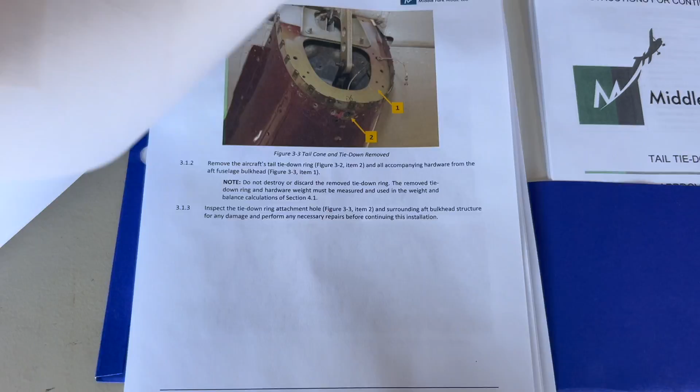It looks pretty comprehensive. They have very nice instructions. This is one area they did not cut corners. Some manufacturers, well, they don't go into this much detail, but these guys included a very nice set of instructions, parts list, and all kinds of very nice detailed instructions. Without further ado, let's get right to it. I'm pretty excited to finally be doing this.

I don't even know what started this, but really, one of the things about 182s, these things are nose heavy. And so I've always wanted to add some weight to the tail somehow, give myself a little bit better CG. There's no legal way to just bolt weight to the back. So I started looking around and I found this mod is mostly geared towards backcountry flying for guys who end up hitting the tail and dragging that tie down ring across the ground and bending up their aft bulkhead and all kinds of other stuff in the airplane.

So also flight schools, people who are still learning to land, sometimes they hit the tail. There's an add-on here. You can see it's an extra skid that goes on top of the tail skid so that it doesn't grind down the aluminum. So we'll get more into that later. Let's get started on the airplane.

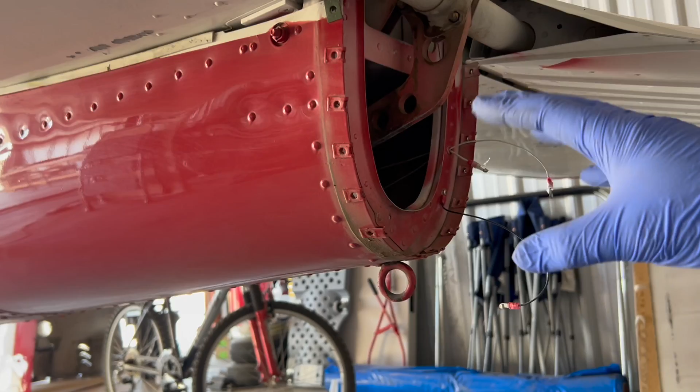First things first, I just need to gain access. So I removed the back stinger off the tail. Here's the factory tie down ring that we're gonna be replacing. That's gonna come out, and that row of rivets right there is gonna get drilled out. You can see the row of rivets that we're gonna have to remove and replace right there.

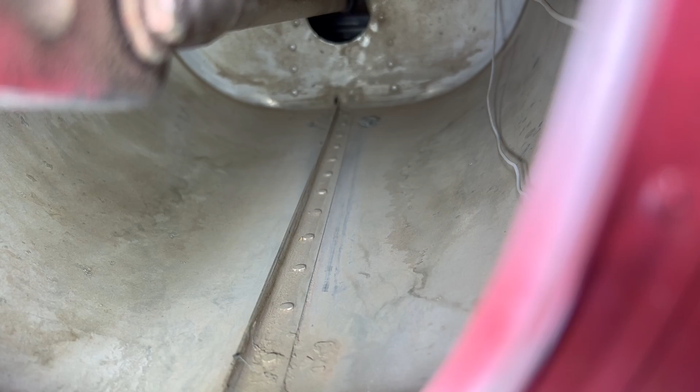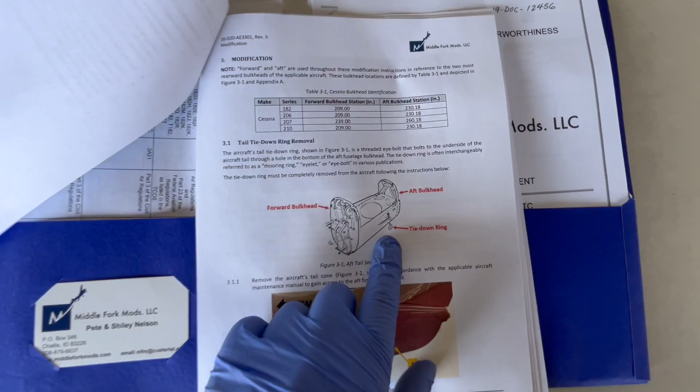First thing we wanna do is remove the tail tie down ring. It's shown right here in figure 3-1. It's a threaded eye bolt. It must be completely removed before we are able to continue. So let's do that. 1/2-inch socket, remove the nut off the tie down ring.

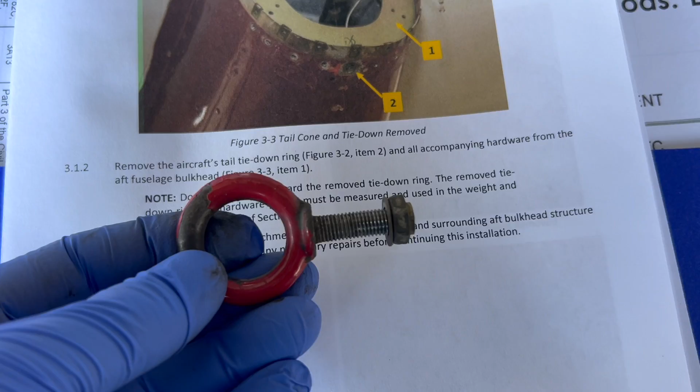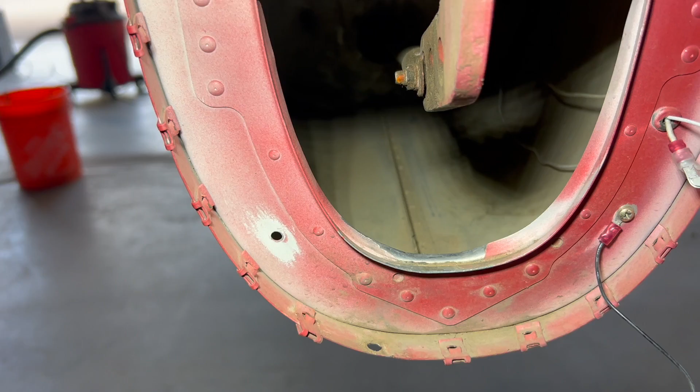So once you remove the tail tie down ring and all the accompanying hardware from the bulkhead, you want to go and inspect this whole area for any damage. Make sure that there's no repairs that need to be made before you start putting this new tie down replacement together. Aside from being a little dirty, I think it looks pretty good.

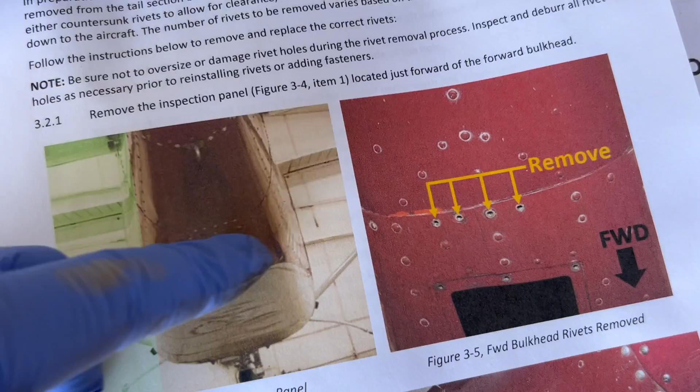Let's move on. Basically from here to here, we need to remove a bunch of rivets, and it calls out exactly where you need to remove them in the installation diagram. So here's what it's going to look like once it's in place. Now I need to go and remove all the rivets, start mocking up the holes for this thing.

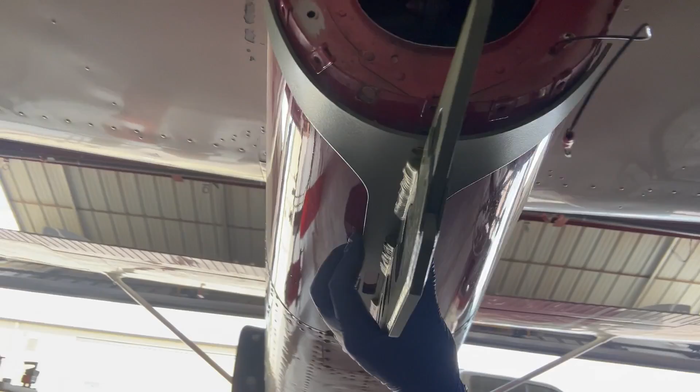I've gone and marked all the rivets that need to be removed along this line, this area right here, and coming up the sides right here. Instructions say it might vary airplane to airplane, so if you're doing this, make sure you check carefully before you start drilling holes in your airplane.

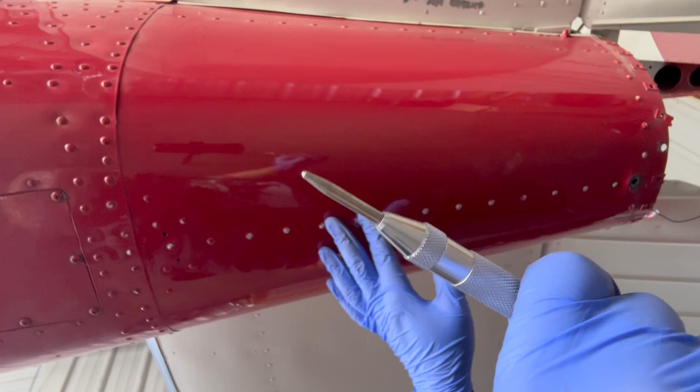So I was just using an automatic center punch, marking the center of all my rivet holes. Definitely helps, especially if you can't see the dimple on the rivet head. These all look like 1/8-inch rivets or -4s. I'm gonna start off by drilling with a number 40 bit, and then I'll pull the heads off with the number 30, and then I should be able to punch the body of the rivet out. It's really important. You don't want to elongate the holes or open up the holes to a larger size. So you gotta be really careful doing this.

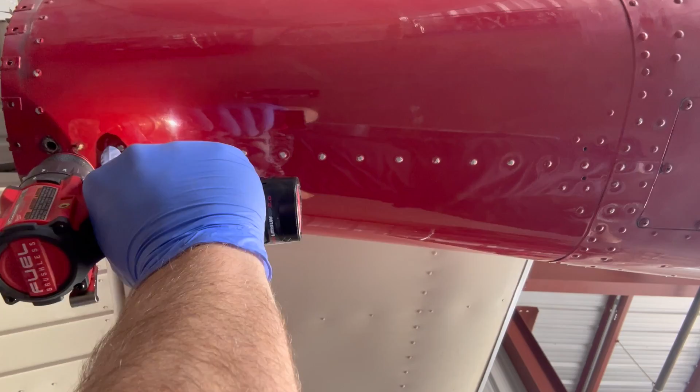All right, I am really struggling with this job and this creeper. I need a better option. There is no way I can finish this laying on my back like this. I need to be about a foot closer or sitting up. I think I found the perfect solution. It's an adjustable creeper. The back sits up, the bottom sits up. You can adjust both sides. I gotta get one of these. I'll be right back, but I don't think I can do this anymore until I have one of those creepers.

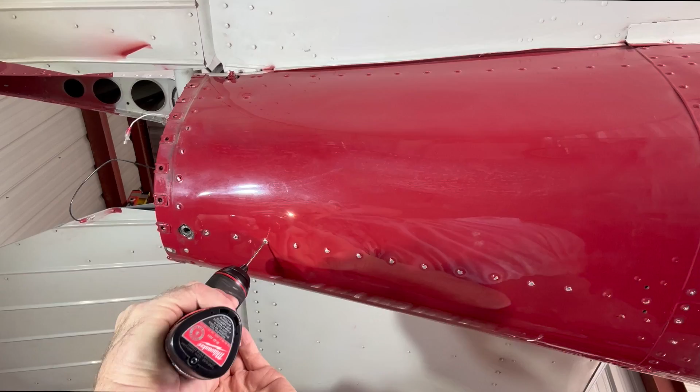Back to what I was doing, drilling out these rivets. All right, now that I've got all my rivets removed, I can start prepping for the dimpling of all these holes. In my typical fashion or fanatical fashion, I feel compelled to get in there and clean before I do anything else. Access was a little bit of a problem, so I removed the elevator push rod, which also helped me get in there for riveting. Let's clean this thing up.

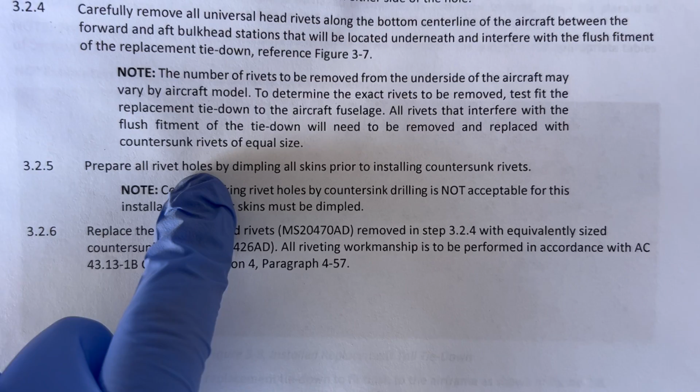All right, well, not perfect. That sure is looking a lot better. Prepare all the rivet holes by dimpling skins prior to installing countersunk rivets. So this is tricky, and what I'm gonna use here is a pop rivet dimple die. So I can go in from the inside, insert my dimple die, and then use a pop rivet gun to set my dimples. Let's try it.

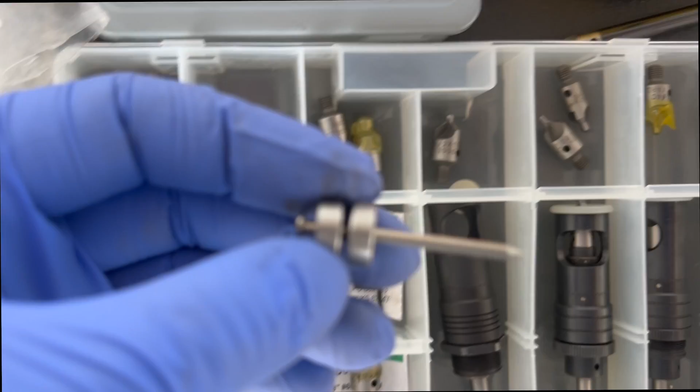All right, so the pop rivet dimple die trick did not work. I'm gonna go to the next level here and try to use a rivet set on a rivet gun with a custom made backing bar with a countersink in it. Let's see how that goes.

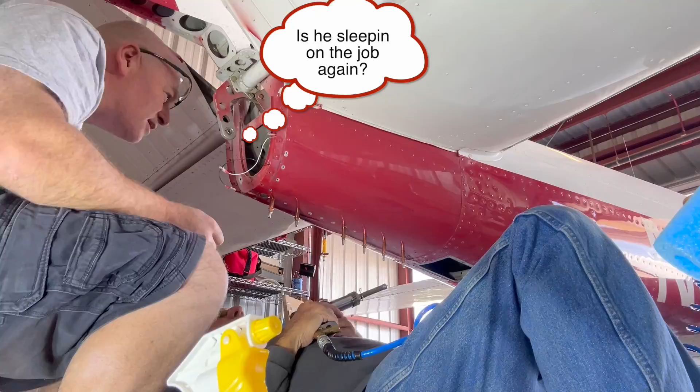The dimpling was a bit of a process, but it went all right. We're gonna go ahead and start setting the rivets now. All riveting workmanship is to be performed in accordance with AC 43.13-1B.

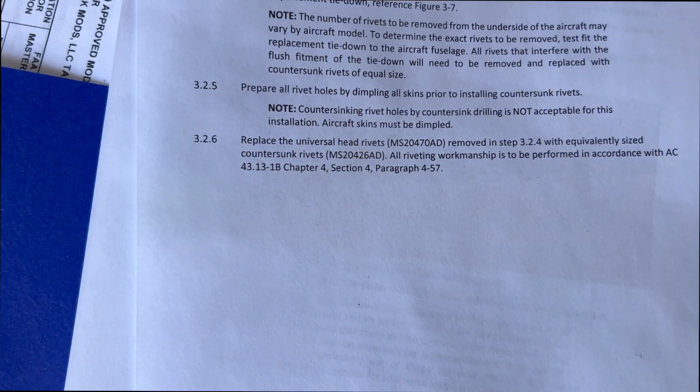That's my helper, Jim. He's my rivet man.

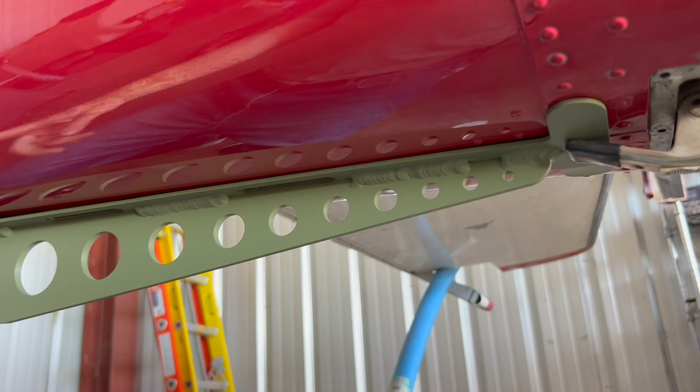Now that we've got the structure all prepared underneath the tie-down replacement, it's time to fit it up and prepare it for attaching to the airframe. Just to recap, first thing we had to do, remove all the rivets underneath here, dimple the skins, flush rivet. So now the tie-down can sit up flush against the belly. All we need to do is match drill our holes around all the mounting points and prepare to attach.

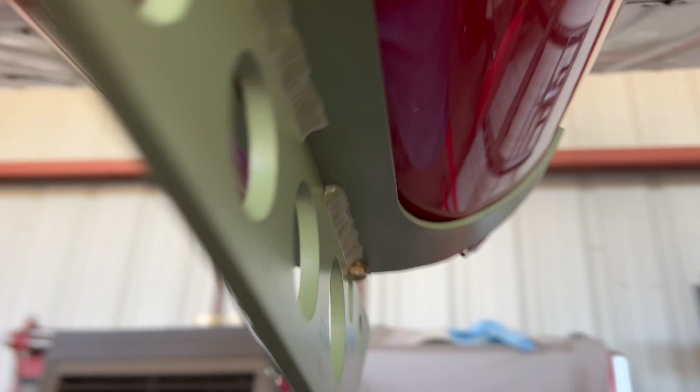There is a note that says you might have to adjust the bend a little bit so that the cradle sits nice up against the fuselage. I did have to make some adjustments here, very minor, but came out pretty good.

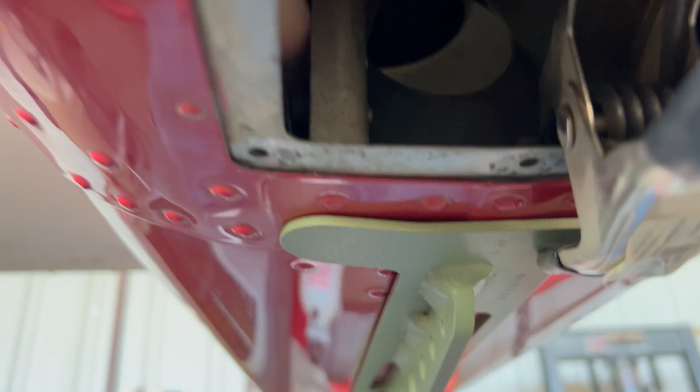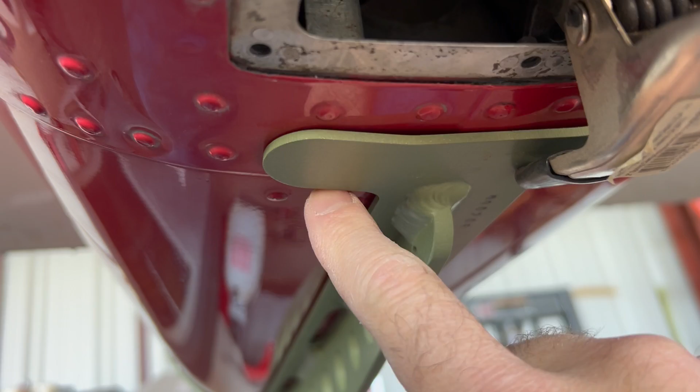This part's pretty tricky. What I'm trying to do, mark the holes from the inside out. I'm using a small number 40 drill bit by hand, and I'm just going up inside and trying to turn the drill a couple times to put some marks on the inside of this surface. So that way I can take it off and I'll see where my hole location is. I can drill it with a small 40 drill, and then I can go and match drill it from the outside.

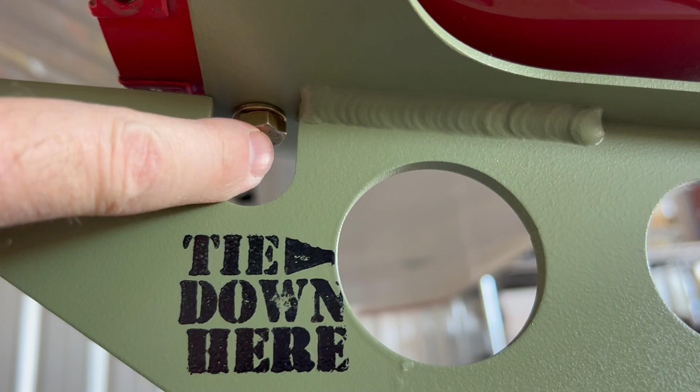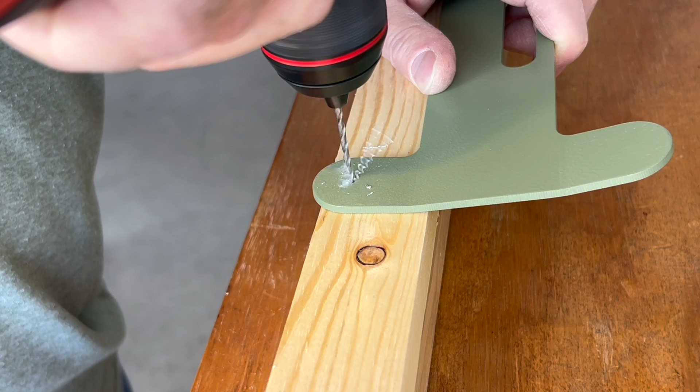On the aft side, I've just got a bolt, which is actually the final bolt that I'll use, but instead of putting the lock nut inside, I just put a non-locking nut in the back so I can easily remove it. Here's the mark I just made by hand with the small 40 drill bit. I'm gonna go drill that, and then I'm gonna put a cleco in that hole. Okay, that worked out perfectly.

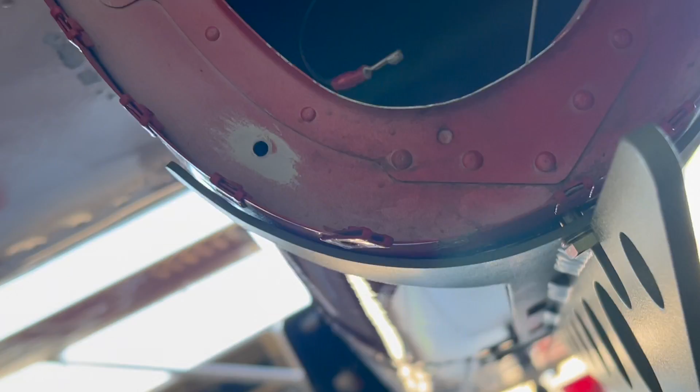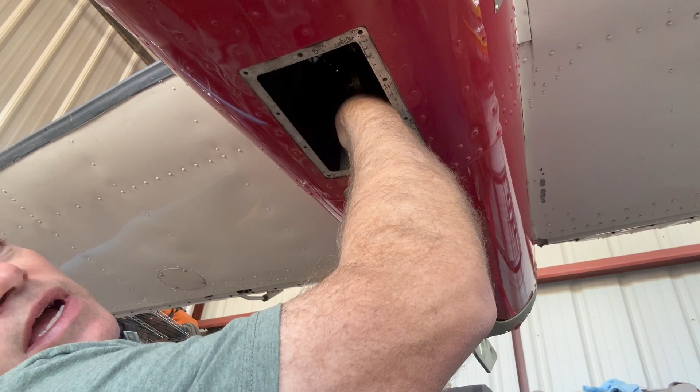Now I just need to do 4 more right here, 4 more right here, and 4 more right here. And these will be a lot easier because I can just get in from the inside there. So same thing, I'm just gonna use a drill bit to go in by hand, find the hole, make little marks, and then drill it on the bench and then match drill it on the airplane, if I can find the holes. That's from pushing down on the drill bit while turning it.

And then these 2 outer ones are the hardest because there's a bracket right here. So you have to go on the other side of the bracket and reach around backwards. All right, that should do it. Let's take a look. Perfect. Let's go drill them out.

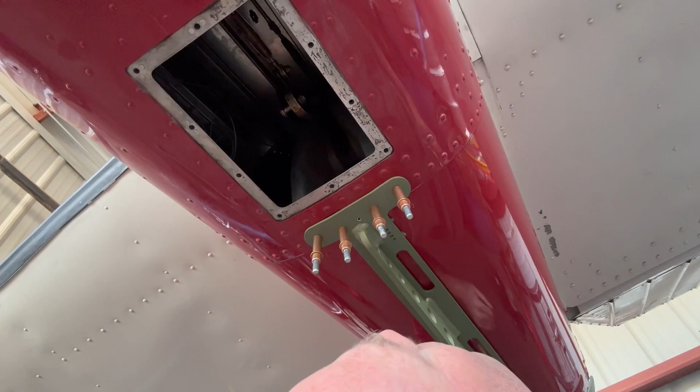That worked out pretty well. All I need to do is final size these to the screws that are going to be installed. And that side's done. Now I just need to do the same thing right here. All right, all my holes have been match drilled.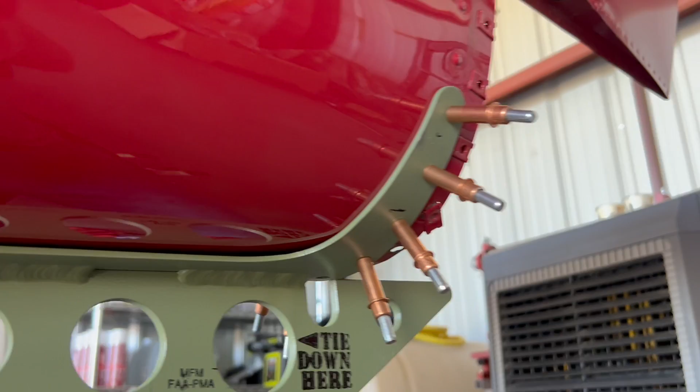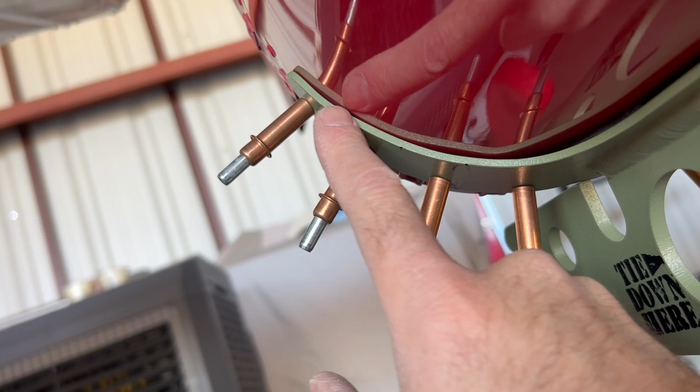I'm really happy with the way this bend came out. That shape is nice. This side was a little trickier. I don't know. That right there kind of bothers me, but I'm not sure if I'm gonna do anything about it. It's kind of hard to flatten that out and rebend it. So I don't know, I may or may not, but either way, all the holes came out really nice.

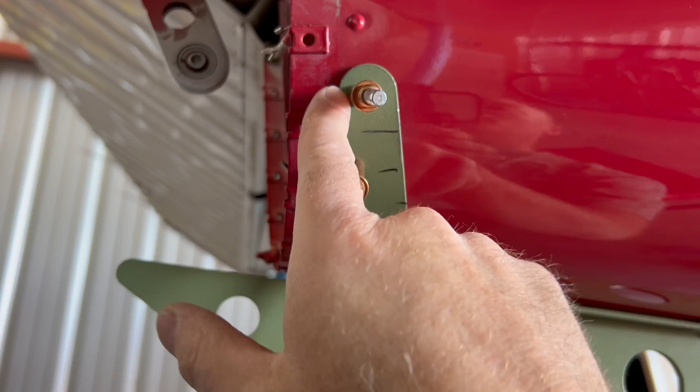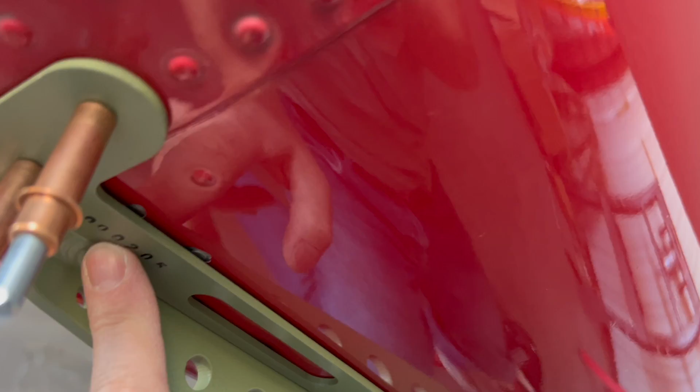This was a little bit farther back than I was hoping, but that's just where it ended up because of the bulkhead. This one was all right. Kind of the same thing, but not as close to the edge. These came out pretty nice also. I've got a couple drain holes here that are blocked, so I'll probably have to re-drill those. Other than that, I'm looking pretty good. It's time to final size all these holes for the screws. Number 19 drill. Beautiful.

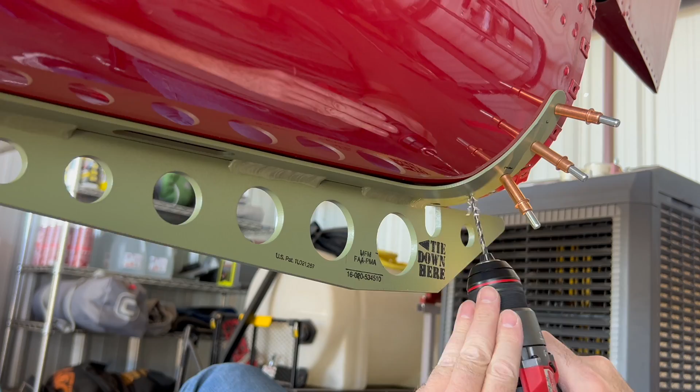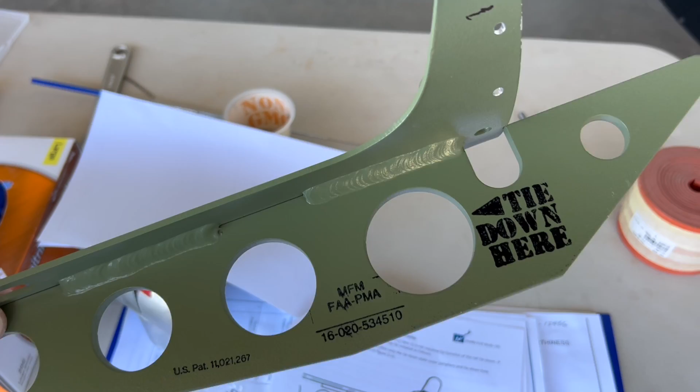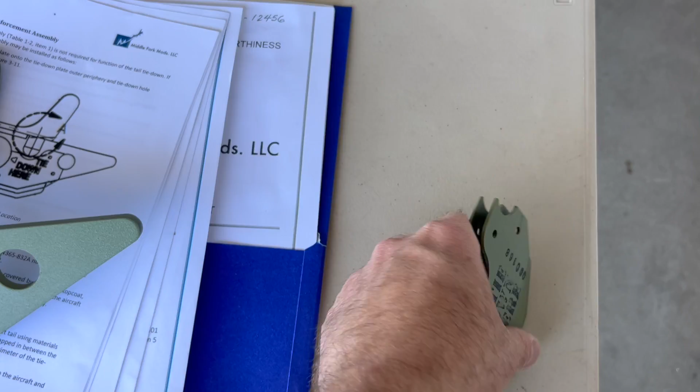Well, that's pretty much it for prepping the tie-down replacement for mounting to the airframe. Before I actually final install it, it's gonna get painted and prepped and all that stuff, as well as any exposed metal on the airplane. Now, I do have an optional item here, the tie-down reinforcement assembly, which is a steel piece that'll mount onto the bottom here like this.

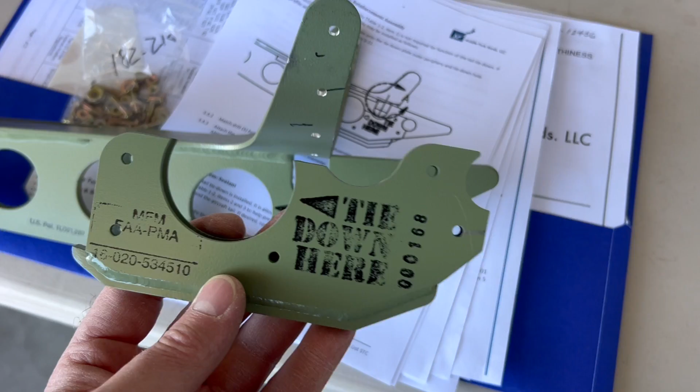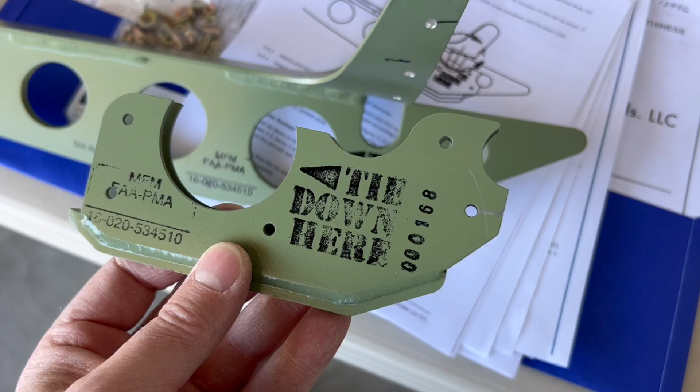And this does a couple things for me. I really like it because it's a little bit more weight in the back, which is good for the 182. And it's also a skid that'll prevent the aluminum from getting torn up if it hits asphalt or anything like that, maybe in a flight school application. But nonetheless, I think this is pretty cool. I'm gonna add it on. It's gonna mount right there. Once I put all this together, then we can paint it and put it on the airplane.

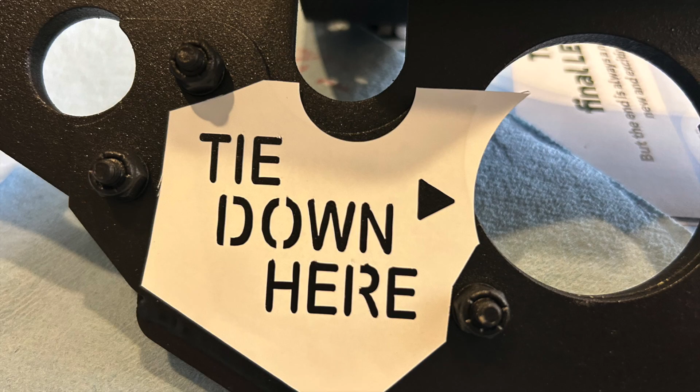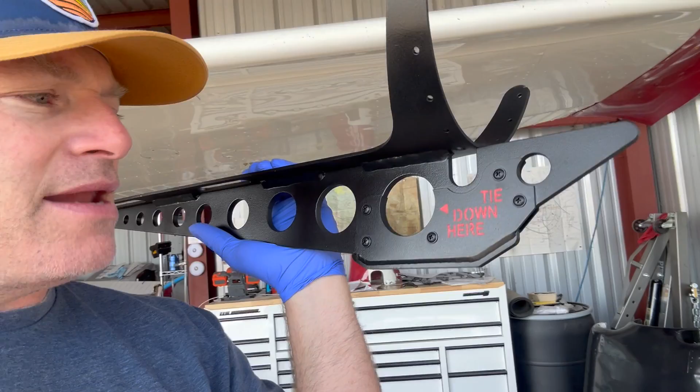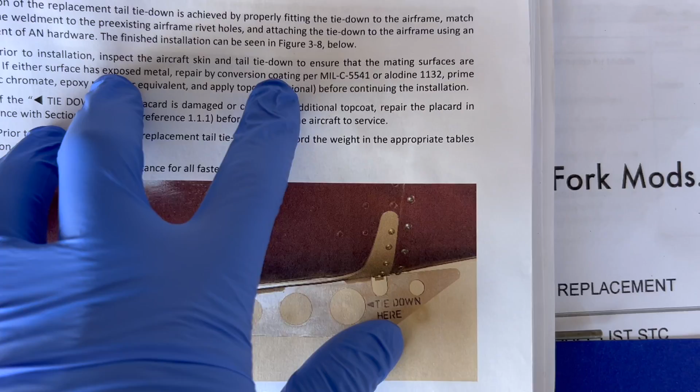Getting into the final steps of installing this thing, I went and painted it and added the placards for the tie down, which is required for the STC and also the ICAs, if you were wondering. Yeah, let's move on. Prior to installation, inspect the aircraft skin and tail tie down to ensure that the mating surfaces are painted. Check. If either surface has exposed metal, repair by conversion coating per blah, blah, blah. Yeah, we did all that.

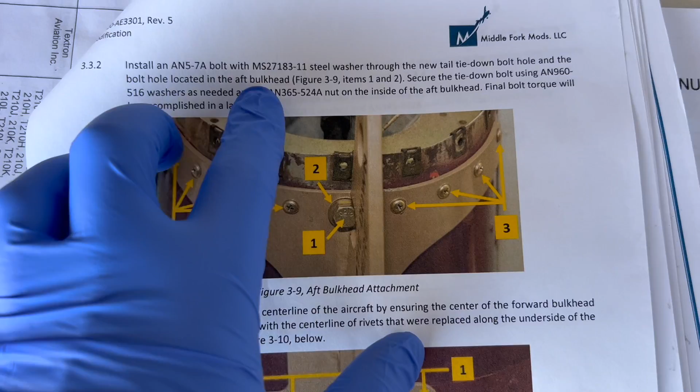Check. All right, here's the fun part we've all been waiting for. Install the AN5 bolts and the steel washer and all the other AN960 washers and AN365 nuts. Cool, let's do that.

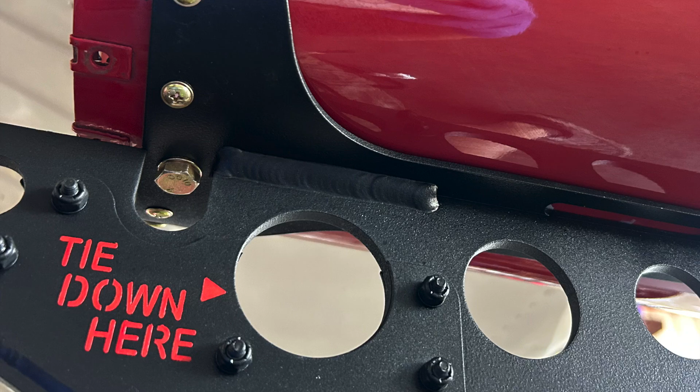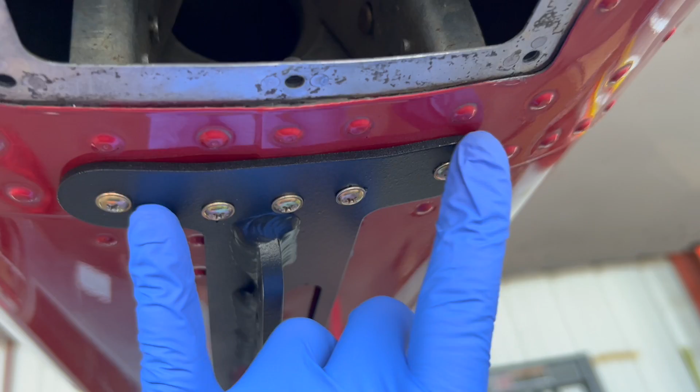Well, there it is. It's all mounted up and final installed. All the hardware secured. Everything looks pretty good. I'm pretty happy. There's a couple gotchas. Let me show you. So these two screws right here were actually pretty hard to get to because these brackets are formed in such a way that you got to go on the inside. So that was a little tricky, not too terrible, but these were easy.

A gotcha right here. There was a couple rivets I had to remove that weren't really expected, but I had to put countersunk heads there. There's two drain holes underneath the new tie down that's covered up, so I'm gonna go and drill a hole right there and a hole right there. If there's any water that builds up in the tail, it'll still be able to drain out.

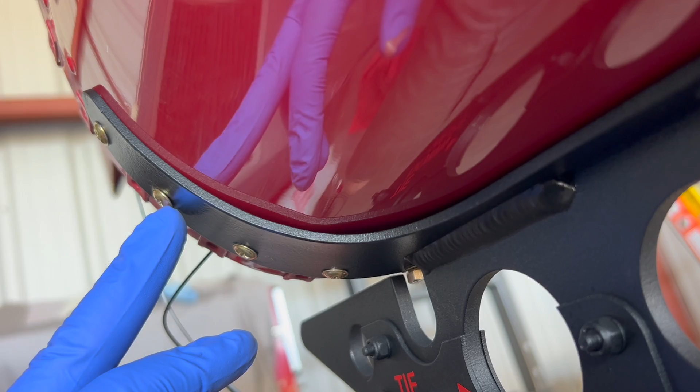I had to form this a little bit just so that it fit really well. It wasn't too far off, but I wanted it to sit down pretty nice, and I'm happy with that. And I'm really happy with the way that came out because I tried to bend this one, had a little crease, and we ended up working on that for a little while, but I don't think you could ask for any better. I decided not to put silicone or anything underneath. If I ever remove it to paint the airplane, I'll paint the airplane, then I'll mount it back up, and I don't have to deal with the silicone issue.

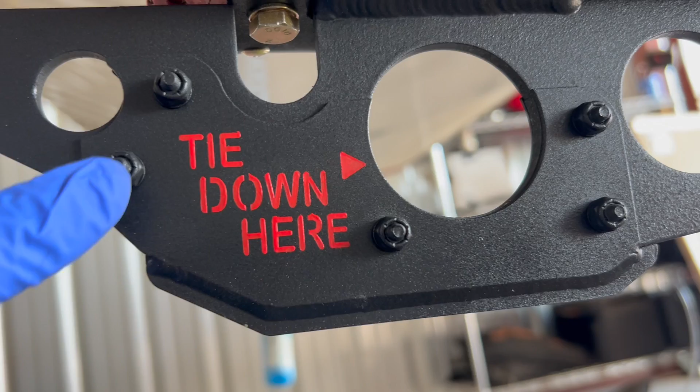The stencils were really nice. This side came out a little bit better. That was the first one, and it's all right. There was a little bit of bleed over, but I can live with that. I haven't put the tail cone or the stinger back on. I hope it fits all the way. If not, I might have to trim the fiberglass a little bit. That's one little gotcha that I'll have to worry about. I'll have to put back the elevator push rod, obviously, and get this thing all buttoned up.

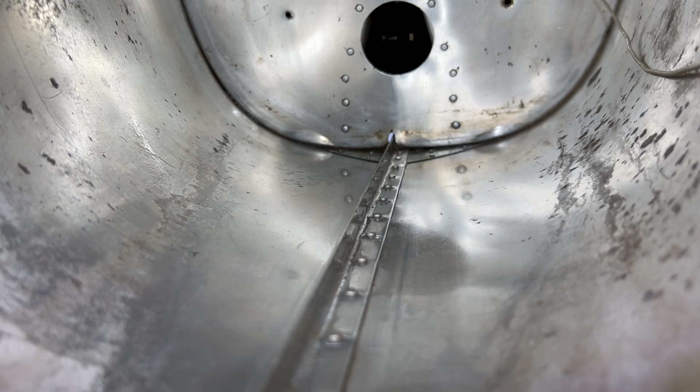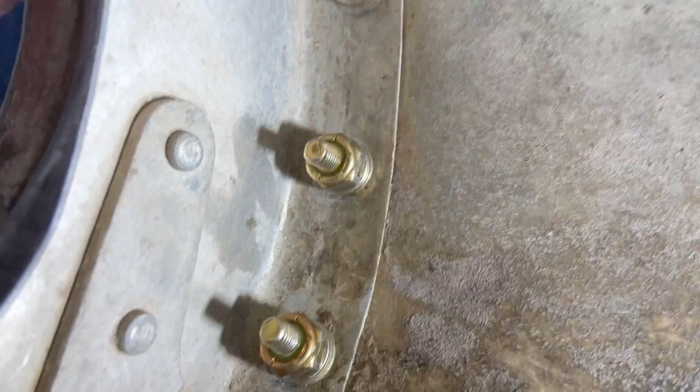Inside the tail looks really good. I cleaned it out best I could and treated it with some ACF 50. I don't expect any corrosion issues in there. I'm pretty happy with the way that came out. Nice opportunity to clean the tail as well. Looking around inside, the way the fasteners came out, I had to put some washers on because there was a gap between the bracket and the surface, so the screws were shanking out. So I had to put some washers on the back, and they gave me plenty of washers for that.

Overall, really nice kit, very well put together. Very happy with the way this turned out. Awesome product from Middle Fork Mods, very high quality build. You could tell from the minute you open the package that they really put time, effort, and thought into this. So all the hardware, the paperwork, the documentation, the tie down replacement itself, everything really nicely done. Highly recommend. So it's a little bit more work than I expected, but in the end, I'm very happy.

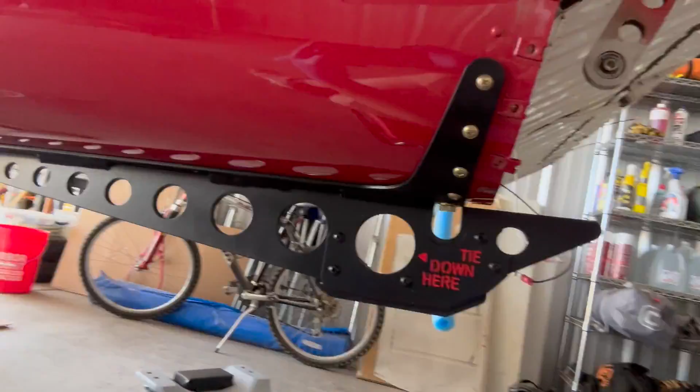I'm gonna put the rest of this thing back together. Of course, all your necessary paperwork, like your 337, logbook entry, all that stuff that goes along with doing any kind of an STC, weight and balance. You can either update your equipment list and/or weight and balance list, or in my case, I'm gonna weigh the airplane just because I can.